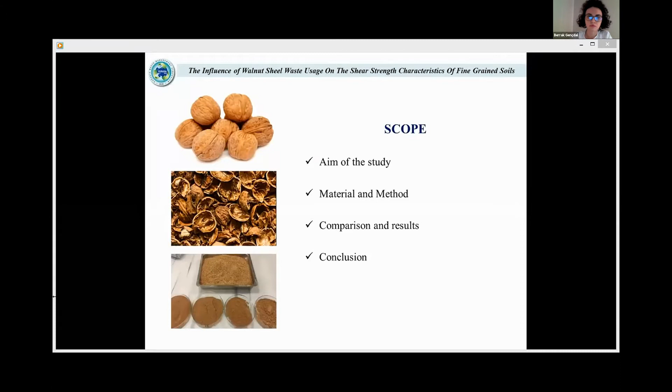Nowadays, the world is seeking solutions to the problems of rapidly decreasing natural consumption and production resources, increasing waste, and decreasing waste storage areas. This problem leads researchers to focus on the recycling or reuse process of materials. In this context, this study deals with the investigation of all herbal resources statistically reported by the Turkish Statistical Institute and the evaluation of the reuse process of these natural herbal wastes.

According to the Turkish Statistical Institute report for 2019, there are 11,251 bearing and 10,004 non-bearing walnut tree crops in Turkey. Besides, the walnut production amount is measured as 222,500 tons. This production process results in the presence of approximately 112,500 tons of shell waste.

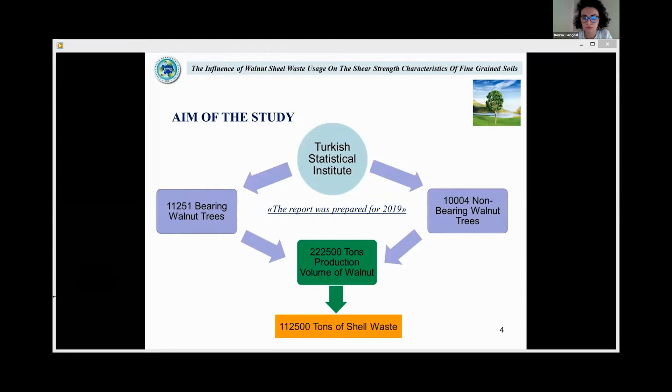This huge volume of waste is used in agriculture, cosmetics, furniture, and heating industries. However, the consumption volume of these materials has not reached the production volume until now. In the context of this study, this additional walnut shell waste was used to improve the kaolin soil.

In the context of the study, as the main material, a white-colored soil with high plasticity obtained from the Kocaeli, Turkey region was used. Experiments have been carried out in the laboratory to determine the geotechnical properties of the soil.

Sieve and hydrometer analysis, pycnometer test, and plastic and liquid limit tests were performed to determine the soil consistency. As a result of the experiments, the soil class was determined as high plasticity according to the Unified Soil Classification System. In addition, as a result of XRD analysis on the soil, 89% kaolin, 3% illite and montmorillonite, 4% feldspar, and 4% quartz minerals were found in the soil.

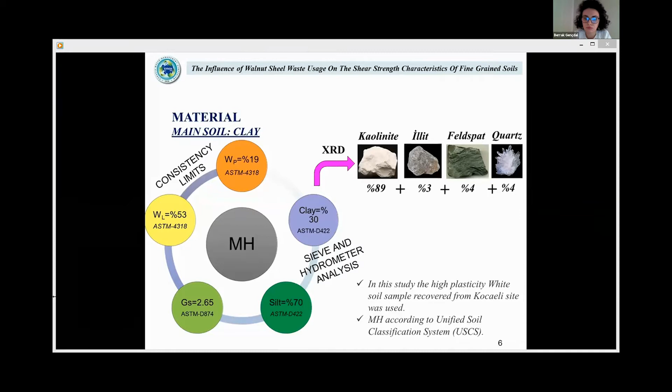If you look at the reason for choosing this kind of soil type, fine-grained soils are considered problematic soils because they show low shear strength under loading conditions and high swelling tendency under unloading conditions. Within the scope of this study, the effects of walnut shell waste on the strength of these soils that need improvement were investigated.

In order to examine the effects of the amount of waste walnut shell on the shear strength of fine-grained soils, soil samples were prepared by adding the additive material in various proportions. For this purpose, the waste walnut shell, 3 or 4 centimeters in diameter, used as an additive material, was broken with a hammer by placing it into a fabric bag, and its dimensions were reduced to between 4.75 millimeters and 0.075 millimeters.

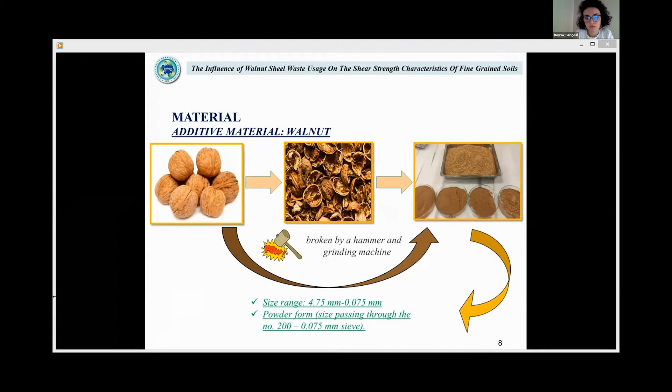In order to examine the effect of waste walnut shell on strength, test samples were prepared by adding pure kaolin and waste walnut shell powder to the kaolin material in different proportions. New soil samples were prepared by adding 5% and 15% of the waste walnut shell by weight of the pure material. The relationship between maximum dry density and optimum water content of the samples was determined by performing standard compaction tests, considering the granulometry of the waste walnut shell added to the soil.

Here, the relationship between the maximum dry density and optimum water content determined by the standard compaction test of all samples is given in the table and graphic. In order to examine the effect of the amount of waste walnut shell and the waiting time on the shear strength behavior of the compacted soil samples, unconfined compression tests were carried out.

Only the compaction test was made for 5% waste walnut shell. Due to the pandemic period we are in, the unconfined compression test could not be performed. In order to determine the effect of the amount of waste walnut shell, the 15% additive rate was examined. In order to determine the effect of waiting time, 0 and 7 days were examined. All of the samples used in the unconfined compression test were prepared by the same method.

The sample which passed through the number 200 sieve during the sample preparation stage was kept in the oven for 24 hours and was expected to lose its temperature after being taken from the oven. The soil was compacted at the optimum water content and dry density values found by the compaction test by adding different amounts of waste walnut shell and kept in the desiccator until the beginning of the experiment. For the unconfined compression test, 3 samples were taken from a compaction mold.

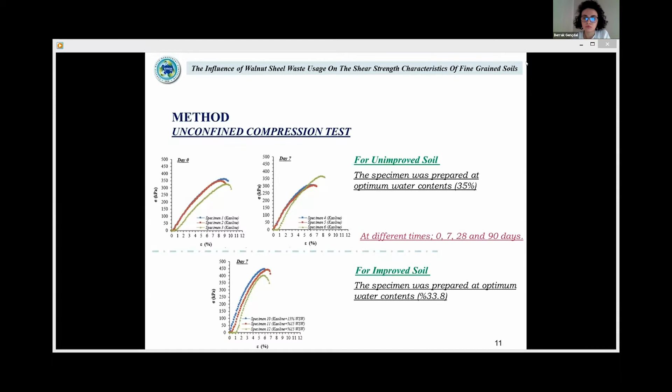The unconfined compression test results on pure kaolin compacted at optimum water content were found to be an average of 172 kilopascal for 0 days and 162 kilopascal for 7 days. The results of the unconfined compression test of the new mixture, in which 15% waste walnut shell was added to pure kaolin, were found to be 215 kilopascal for 7 days. For 0-day evaluations, the failure results of pure kaolin are clear. Due to the pandemic period, there are no failure results for the amount of 15% waste walnut shell for 0 days for now.

For 7-day evaluations, the failure result of pure kaolin was 162 kilopascal on average. The failure result of the new material prepared by adding 15% waste walnut shell was found to be 215 kilopascal. Considering the test results of the new material prepared by adding 15% waste walnut shell and pure kaolin under the unconfined compression test, the increase in the amount of walnut caused an increase of 25% in strength.

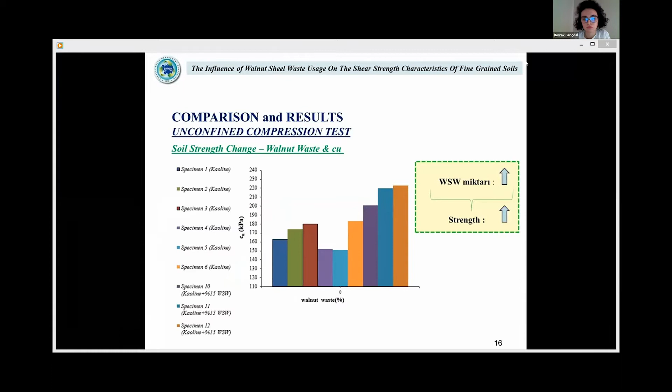The 0 and 7-day test results of pure kaolin are very close to each other. A decrease of 10 kilopascal was obtained in the undrained shear strength values for the 0 and 7 days. Although this value is not a serious loss on the sample basis, no increase in the strength of pure kaolin has been observed over time.

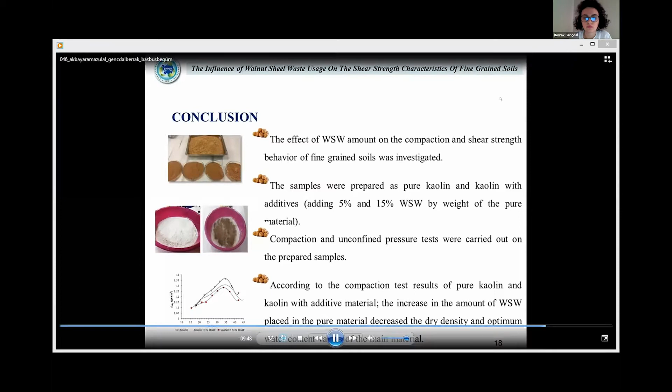The effect of walnut shell waste amount on the compaction and shear strength behavior of fine-grained soils was investigated. The samples were prepared as pure kaolin and kaolin with additive. Compaction and unconfined pressure tests were carried out on the prepared samples. According to the compaction test results of pure kaolin and kaolin with additive material, the increase in the amount of walnut shell waste placed in the pure material decreased the dry density and optimum water content values of the main material.

Unconfined pressure tests were performed on 9 samples in total. Tests were carried out considering the amount of walnut shell waste and breaking days. According to the test result of pure kaolin samples, 0 and 7-day strengths are obtained the same. According to the unconfined pressure test results of pure kaolin and kaolin additive samples, the 7-day strength of the additive samples is 25% more than the 7-day strength of the pure samples.

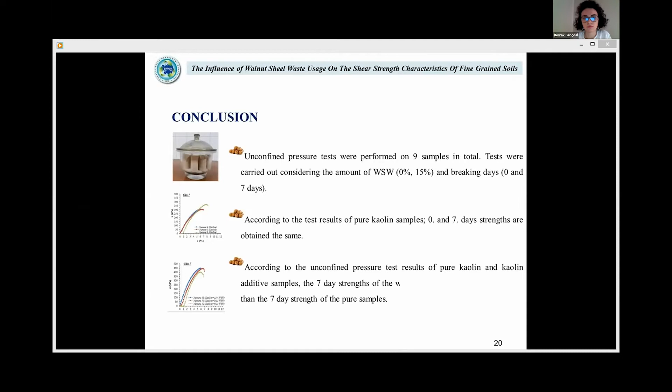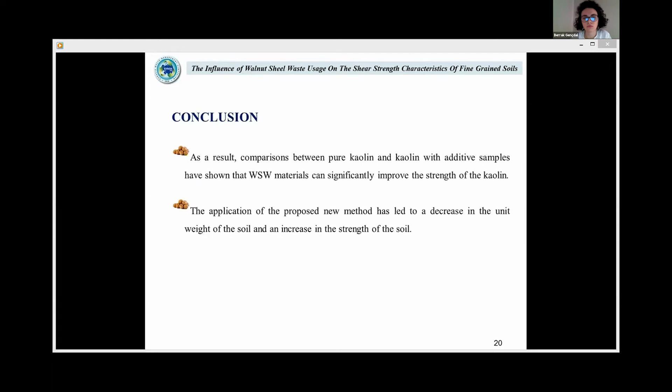As a result, comparisons between pure kaolin and kaolin with additive samples have shown that walnut shell waste materials can significantly improve the strength of the kaolin. The application of the proposed new method has led to a decrease in the unit weight of the soil and an increase in the strength of the soil.

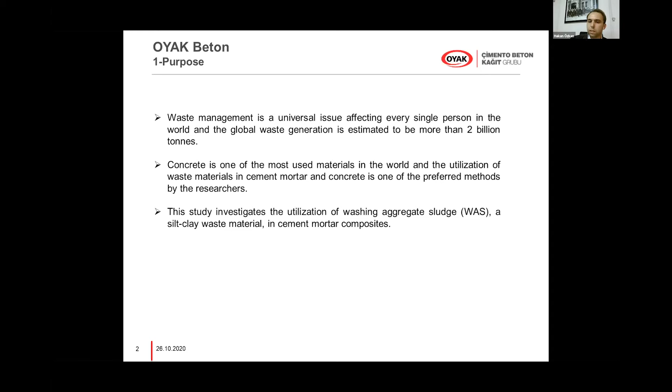So, Turkey is one of the famous countries to produce concrete and cement. It means that we have lots of aggregate quarries, so lots of aggregate quarry waste material. To sum up, concrete is one of the most used materials in the world, and the utilization of waste materials in cement, mortars, and concrete is one of the preferred methods by the researchers. This study investigates the utilization of washing aggregate sludge in cement mortar composites. After that, I will call washing aggregate sludge WAS.

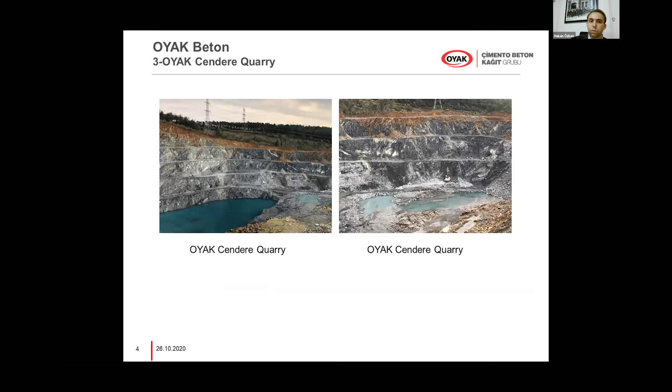The chemical composition of this aggregate is silicon dioxide, so we can call this aggregate sandstone. Due to this chemical composition, the dikes you can see on the left side, and the weathering zone found in the quarry under investigation, this quarry requires some improvements. There are three main products of these aggregate quarries after the process. One of them is crushed sand. This crushed sand includes silicon dioxide, and its methylene blue value is a bit higher, so using this crushed sand in concrete mix design is not possible. Because of that, an aggregate washing system is necessary, and there is one in OYAK Concrete Company's quarry.

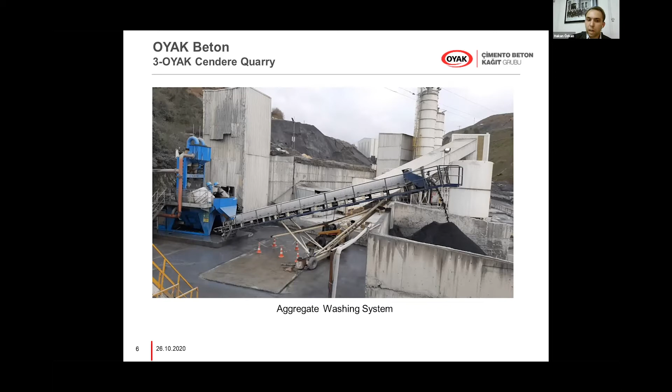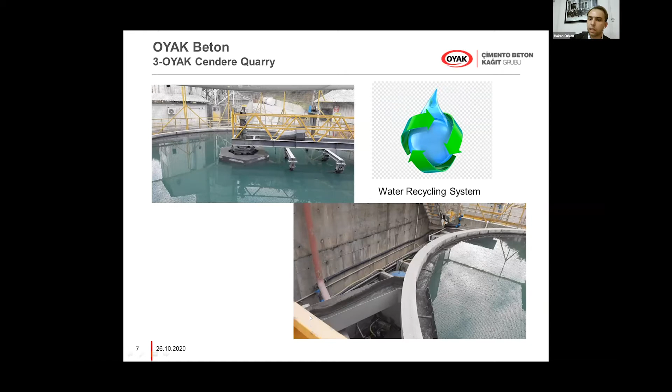At the end of this system, you can see here, there is washed crushed sand. It can be used for concrete mix design, and the methylene blue value is sufficient and very low. But this system produces a waste material, and this waste material is the filler dust with water. It comes to this pool and goes to the bottom of this pool. The bottom of this pool is waste material. The top is clean water, and the clean water comes through the channel to the recycling water stocking area. Here, there's a filter press system. Finally, the waste material, meaning dust with water, comes to the filter press system.

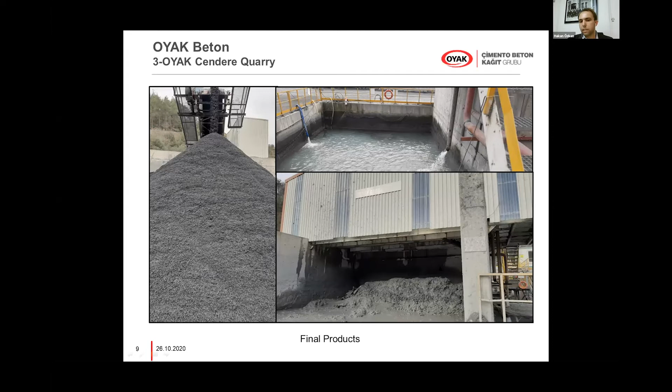Then 3 main products come out. One of them is washed crushed sand. The second one is recycling water. It means clean water that can be used for whatever you want; especially we are using it for concrete mix designs. The last one is washing aggregate sludge, WAS. This is our waste material. You can see here, this waste material has a humidity of 25%. If you want to use this waste material for your experimental study, first of all, you have to dry it and grind it. After that, you can use it.

Now I will show you a short video. This short video will explain the whole process of these aggregate quarries, the aggregate washing system, and the recycling system. It takes 3 minutes. The language of this video is Turkish, but it's not important because I have already explained all of it.

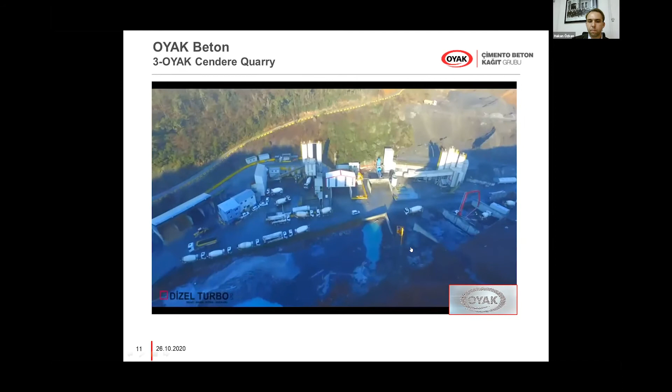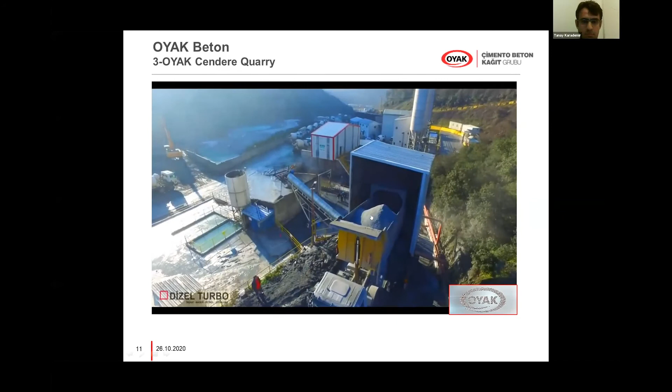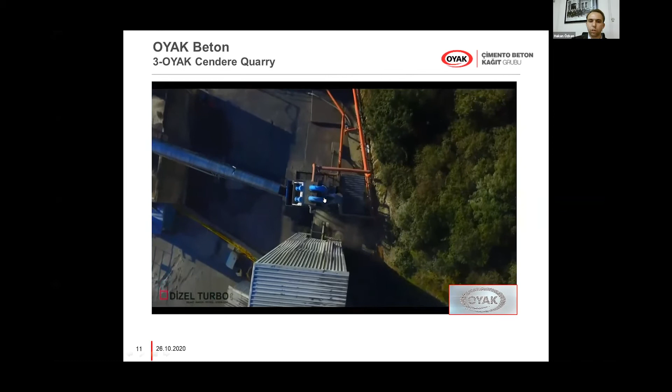This is the Oyak aggregate quarry. There are 2 concrete plants and 1 aggregate quarry. Crushed sand comes to the first loading area. This is not washed crushed sand, and the methylene blue value is a bit higher. Here is the washing system, CDE EVO wash. Final product.

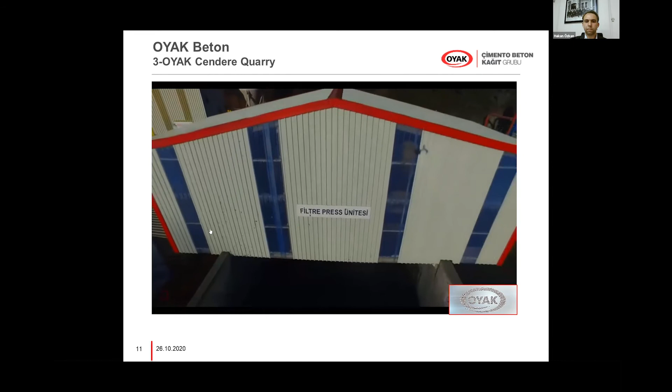Yeah. And we can come to our experimental study. We use this washing aggregate sludge that was obtained from the Oyak Ready-Mix Concrete Company, as I said, and we use type one cement, and we obtained this cement from Bolu Cement, which is also one of the Oyak companies, and silica sand.

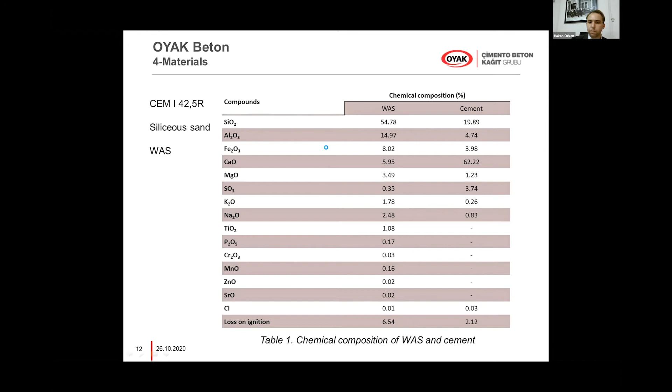And here we can talk about our mix design. Three incorporating methods were used, and their effects on the durability properties of cement mortars were researched in this study by determining the void content, sorptivity, and non-steady state chloride migration tests. And there are 2 different replacement ratios, 10 and 20%. First of all, we performed cement replacement, then fine aggregate replacement, then paste replacement. In total we have 7 different mix designs.

The reference mix design ingredients for 1 cubic meter are here. And as I said, we have 3 different test methods: voids content in accordance with ASTM C642, sorptivity test ASTM C1585, and chloride migration coefficients in accordance with NT Build 492, which we have performed.

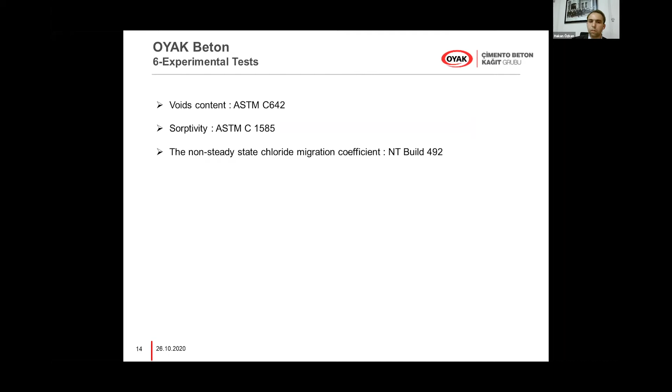For the fine aggregate replacement, sorptivity and chloride migration coefficient are also higher than the reference mortar, but better compared to the cement replacement. And void content is nearly similar to the reference mortar.

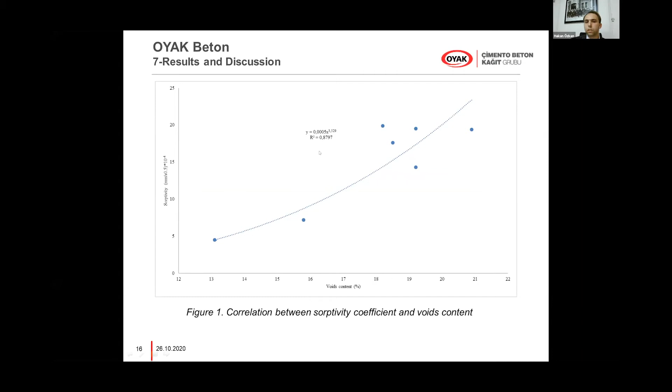And also, we can say that void contents have a good correlation with sorptivity, with a correlation coefficient of 0.88. And a similar correlation is seen between void contents and chloride migration, 0.81.

As a conclusion, the paste replacement method was found to be the most effective way of utilizing WAS in cement composites. The aggregate substitution method provided better results than the cement substitution method. For the paste replacement method, the sorptivity coefficient was reduced by up to 70%, the chloride migration coefficient by up to 7%, and the void content by up to 32% compared to the reference mortars. Sorptivity and chloride migration coefficients have a good correlation with the void content. And that's all.

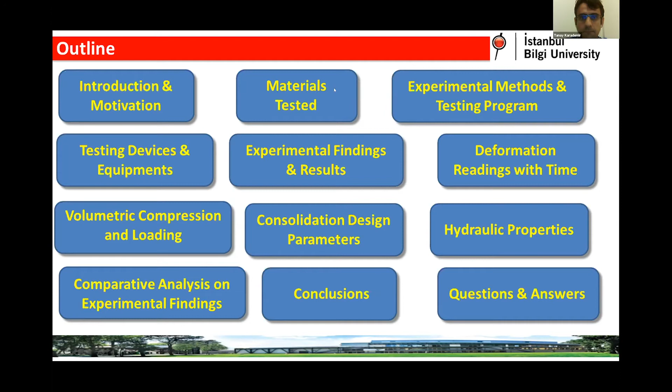lime stabilization or lime soil treatment is a chemical process in which lime is mixed with in-place soil, and later lime reacts with clay particles in the soil to provide a cementitious matrix. In this perspective, lime has been used as a modifier or binder, and the treatment of clay, especially having high plasticity, will result in reduction of the plasticity index, and thus the clay will possess less affinity with water and less tendency to exhibit substantial volume changes such as dilation or contraction.

In engineering, the improvement of engineering design properties of a soil in the geoenvironmental area must satisfy the project requirements. This is called soil stabilization. The design of landfill baseliners, including a clay layer as a water-resistant impervious layer, requires a neat engineering approach considering consolidation behavior and hydraulic properties of the clay. For safe and stable design of the baseliners, we need to reduce the consolidation settlement in clay when it is subjected to waste load.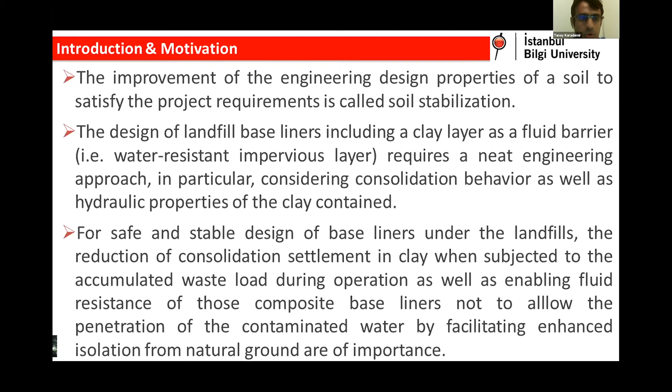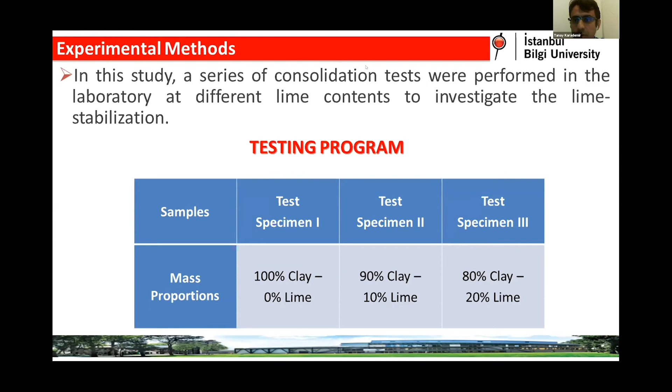This is the testing program. A series of consolidation tests were performed at different lime contents, 0%, 10%, and 20% lime added into bentonite clay. The results of the consolidation tests were used to determine consolidation engineering parameters, including coefficient of consolidation, compression index, recompression index, and coefficient of permeability for assessing hydraulic characteristics.

The test specimens had dimensions of 6 centimeters in diameter and 2.5 centimeters in height, and were placed in a stiff metal ring between two porous stones. Each test continued about 6 days with sequential incremental loads of 5, 10, 20, 40, 60, 80 kilograms successively. Each load increment was maintained 24 hours, and vertical displacements were measured every day at different loading conditions.

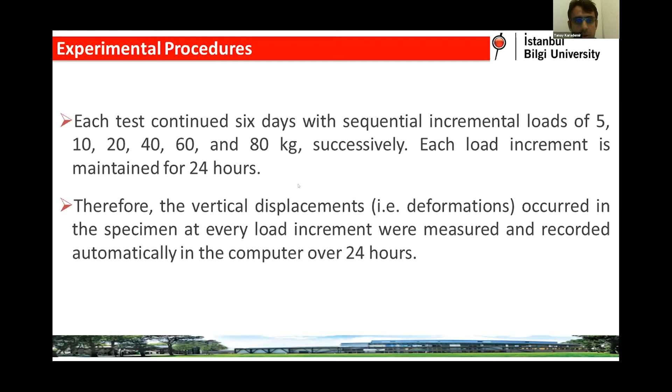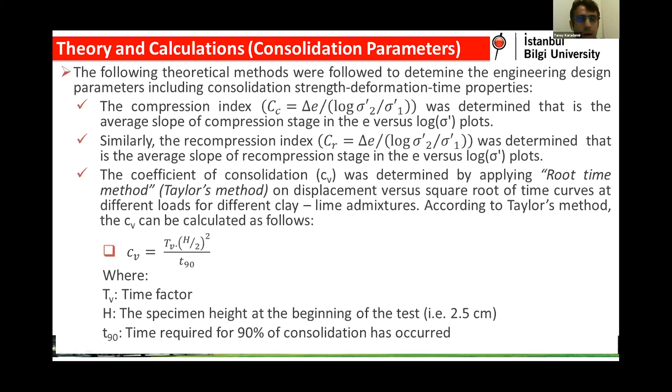I would like to briefly mention the theory and calculations. The following theoretical methods were used to define consolidation parameters, such as the compression index, the slope of the e versus log sigma prime curve, and the recompression index was also determined. Additionally, we calculated the coefficient of consolidation Cv using Taylor's method, as you see in the equations. Hydraulic conductivity properties were also determined based on Terzaghi's one-dimensional consolidation theory using this equation.

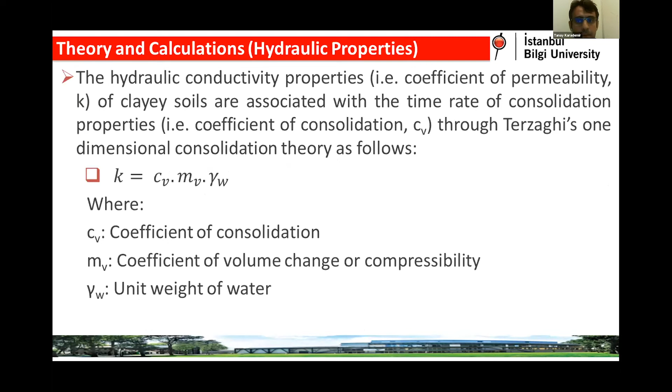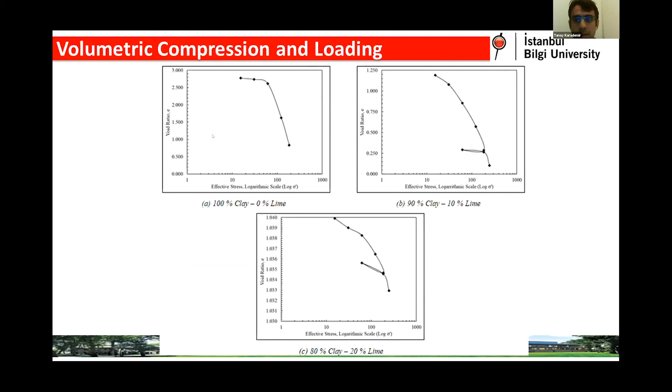Now we see the void ratio versus effective stress graph in order to understand volumetric compression due to loading. Here, the compression and recompression stages are evident in the curves. We see that the behavior is basically elastoplastic, so some part is recoverable, and another is permanent. For the recoverable part, we defined Cr, the recompression index. For the plastic stage, we defined the compression index. Additionally, unloading and reloading stages were performed.

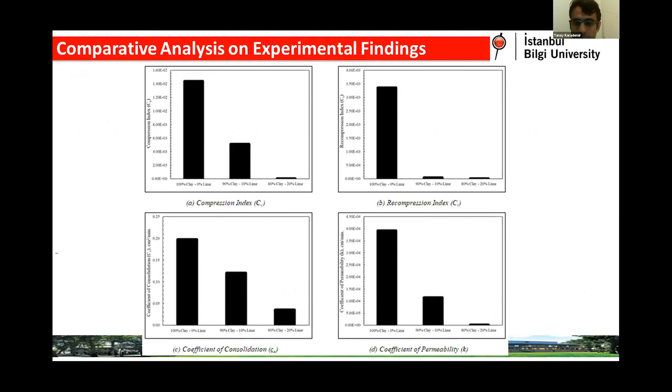Here are the results of the comparative analysis of experimental findings. Addition of lime has resulted in the decrease of compression index, recompression index, coefficient of consolidation, and permeability. Here are the values. The compression index has reduced from 10 to the minus 2 down to 10 to the minus 5. Similarly, Cr, the recompression index, reduced from 10 to the minus 3 down to 10 to the minus 6.

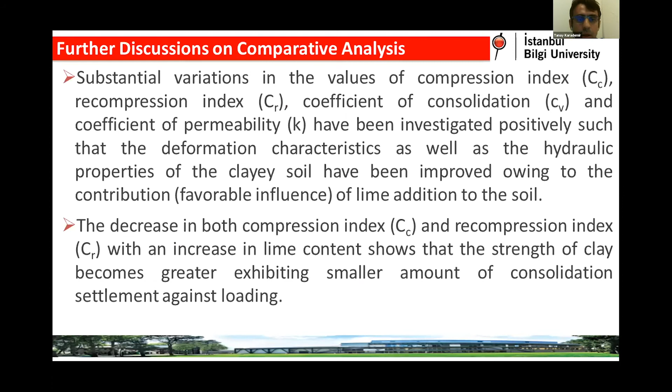And so the substantial decreases in the values of CRCC is due to adding lime, so that has a positive impact. And also, hydraulic coefficient of permeability, hydraulic properties, shows a reduction. This is good for enabling isolation or insulation.

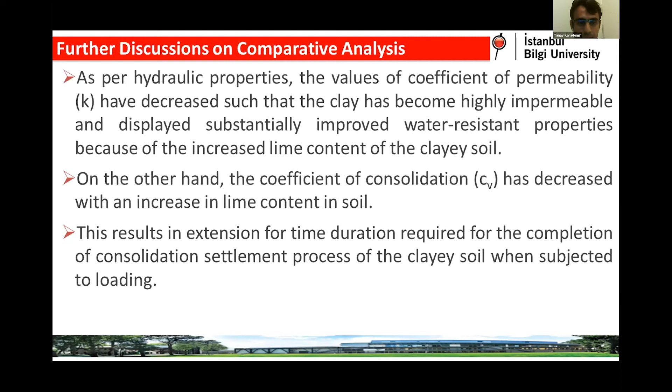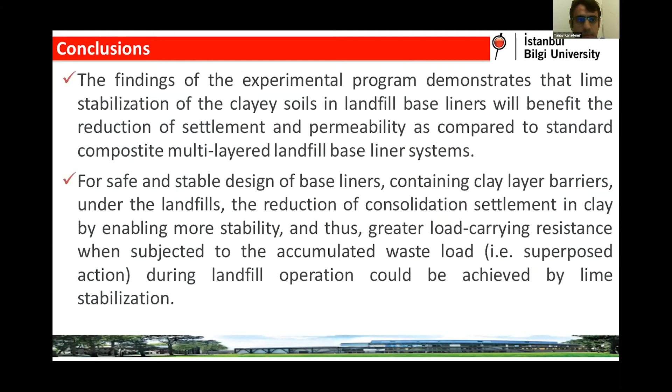And the findings of the experimental program demonstrate that the lime stabilization of clay soils will result in the reduction of settlement and the permeability properties. So, for safe and stable design of the baseliners containing clay, will benefit the project. And reduction of hydraulic conductivity, correction for permeability, will result in the isolation of the system.

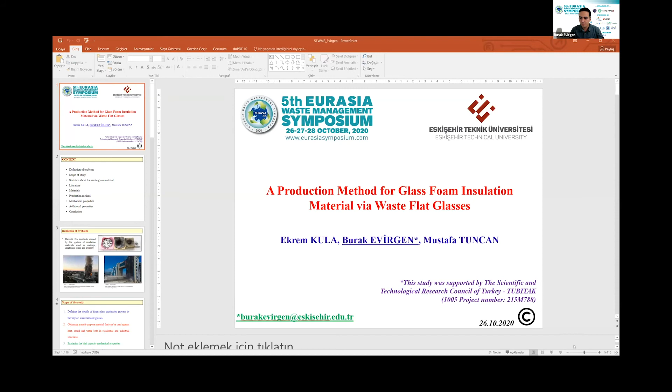Okay. Welcome, dear guests. I am Burak from Eskişehir Technical University. Now I am working at the Geotechnical Division in our Civil Engineering Department. In fact, my points of interest are soil improvement techniques, artificial ground freezing, soil foundation interaction, and maybe pile foundations. Although my real point of interest is geotechnical engineering, today's subject is related with material properties.

We try to reuse waste flat glasses, waste window glasses, within the production of glass foam insulation material. It is a part of our TÜBİTAK project, a detailed TÜBİTAK 1005 project. And this type of project is related with the domestic production of import materials. And we know that we do not have any production of glass foam material in our country, and we try to offer it as an alternative material.

This is the content of my presentation. First of all, I would like to define the problem about the insulation materials and then the scope of study. I want to give some statistics about the waste glass materials within our work. And then literature, the critical point in the literature. And I will list our raw materials, foaming agents, and the production method. And maybe we can talk about the mechanical properties. And our foam glass material has additional properties if you compare with its alternative insulation materials. And I'm going to list the conclusions of this study.

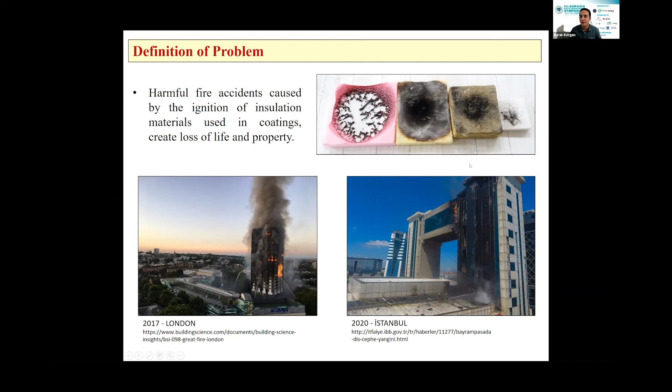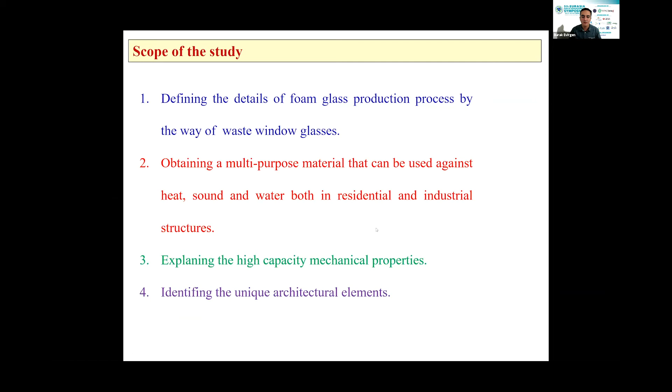And these are the scopes of our study. First one is defining the details of the foam glass production process by way of waste window glasses. The second one is obtaining a multi-purpose material that can be used against heat, sound, and water at the same time in residential and industrial structures. Third one is explaining the high capacity mechanical properties and identifying the unique architectural element. It is maybe our additional property.

And a little bit of statistics from literature. If we focus on the European countries at the beginning of the 21st century, their recycling amount reached up to 75%. But in our country, around the same time, our recycling ratio was around 23%. But after around 10 or 12 years, our recycling ratio decreased to around 5%. Also, our waste materials are increasing, but we must recycle them into suitable materials.

If you search the literature, we can find many foam glass materials with different raw materials, different foaming agents, or different mechanical properties. But this point is so important. The glass foams in the literature are not suitable for mass production in industry. Many of them are generally produced as laboratory scale specimens.

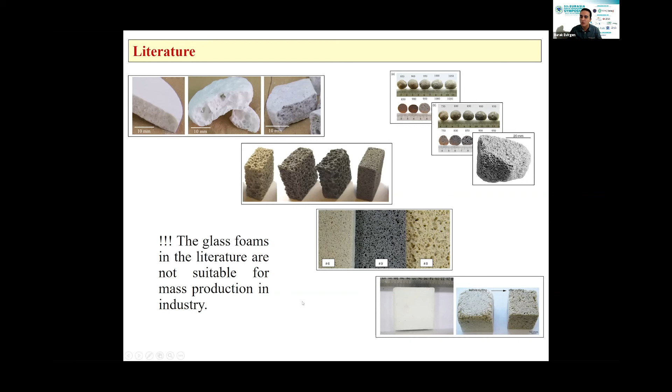These are not suitable for industrial production. We try to produce big scaled foam glasses in our project.

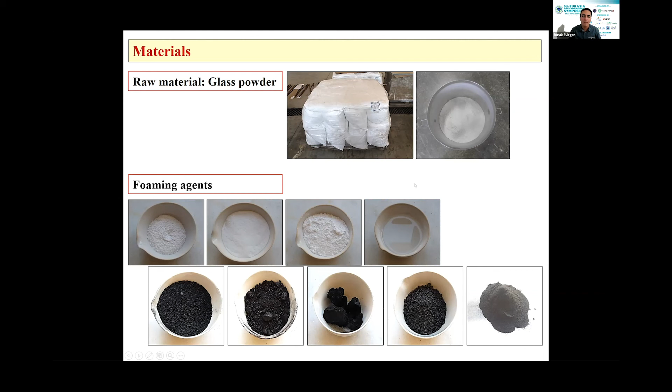This is the production method. The first stage is the mechanical processes, as I said before, for production of type 2 glass powder. We take broken glasses from our university and break them into smaller parts by hammer, then put them into the process.

Into the Los Angeles abrasion machine. As you know, we generally use this machine for concrete or asphalt pavement elements to determine the abrasion value. Then the final stage requires the grinding process also.

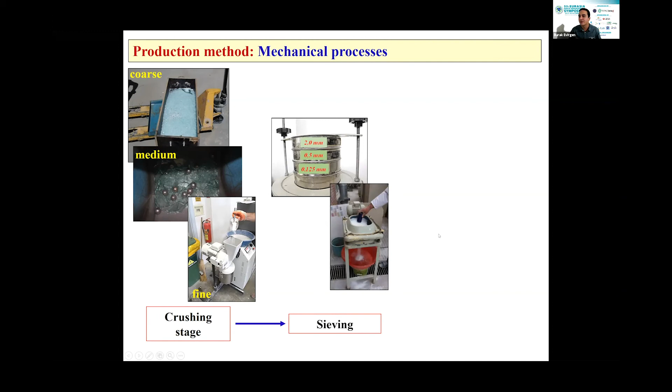After these processes, we pass to the sieving stage for the raw material, only the waste glass powder, and sieve it up to reach the 125 micron level. Then the mixing process comes, where raw material and foaming agents are mixed together.

The molding stage, I think, is the most important stage of the production method. We also produced 3 different elements.

One of them is plate elements for exterior or interior covering of buildings. The next one is architectural elements for production of aesthetical elements, and the last one is fitting parts for industrial applications. In the plate molds, first of all, we used a vermiculite type of molding material.

Vermiculite is a type of clay element, and these plates or molds are produced with the compaction of vermiculite grains. We also produce different sizes of elements, for example a 10 centimeter unit length cubic element, and a 1 meter by 1 meter large scaled element.

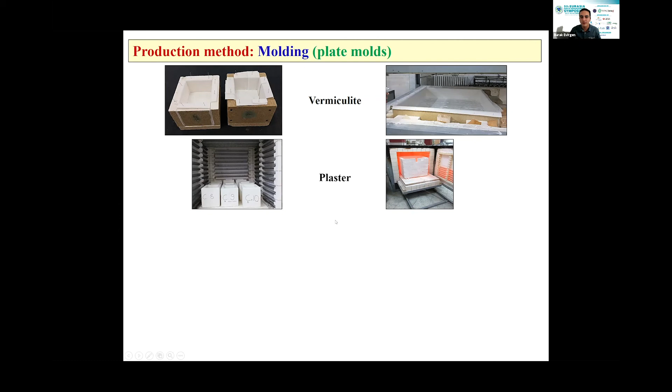In the next stage, we use plaster material for production of the plate, and then standard industrial steel is used. Finally, we decided to use stainless steel as a special product for molds, for a 50 centimeter by 50 centimeter unit volume also.

Sandblasting is applied to the stainless steel material, and then we use a paper type of material to easily take the specimens out of the molds also.

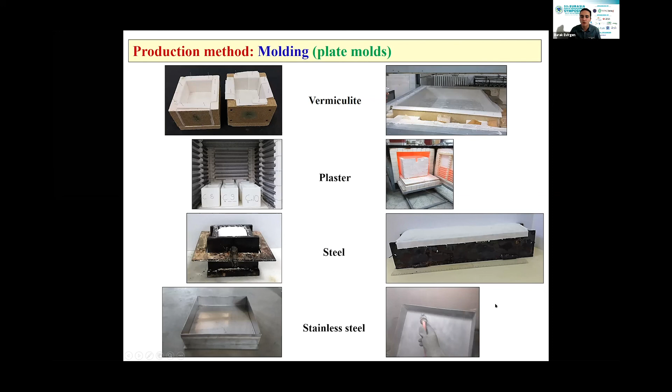The last stage of the molding is the fitting molds, and we use refractory ceramic material to design unique molds in that case. And these are the final products.

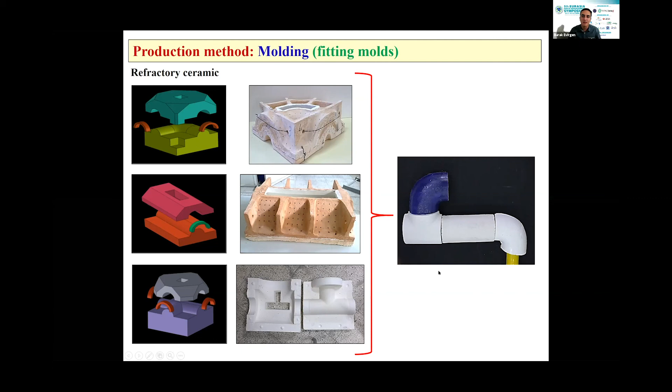Also, we produced fitting elements, producing foam glass materials for the outside of pipe elements for industrial application. As you know, some firms work with high temperature hot, or minus degree cold, within their piping systems, requiring this fitting insulation.

It is essential also. The next stage is the sintering and sizing processes. As you know, sintering is the other name for heat application.

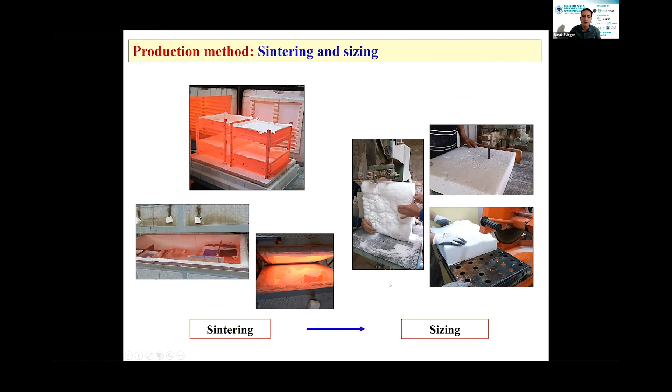We tried 10 different heat processing methods, or heat diagrams, inside different types of ovens. After completion of foaming up to the required thickness, the sizing stage started, using different types of saws to size our original members.

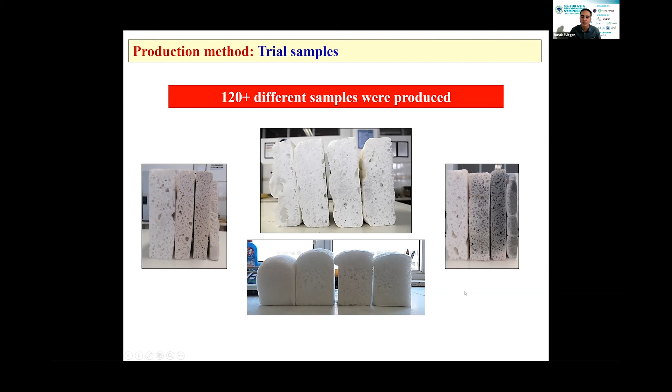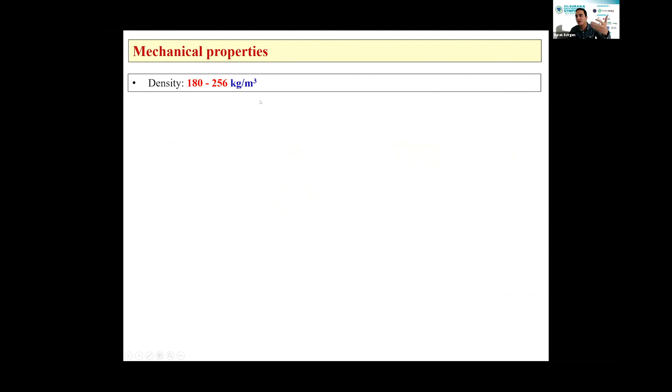Let's talk about the mechanical properties of our foam glass materials. These 6 different foam glass materials, final products, have superior mechanical properties, and their density changes between 180 to 256 kilogram per cubic meter. This density range can be reached up to 400 kilogram per cubic meter around worldwide.

Water absorption capacity in terms of surface absorption is around 0, and it can be used as waterproofing at the surfaces also. The water absorption capacity according to immersion test can be reached up to 3.5 kilogram per square meter or cubic meter according to the TS standard. But the important one is the surface absorption capacity.

The temperature insulation delta T changes between 9.6 to 11.1 Celsius per centimeter. And sound insulation, we can reach a 20 to 30 decibel sound insulation level. And all of these 6 different specimens have A1 class fire resistance certificate.

The thermal conduction coefficient, lambda, changes between 0.03 to 0.05. The maximum range of this value is given around 0.06 inside this standard, with the unit of watt per meter Kelvin. And the compressive strength is maybe the unique point of our material.

The compressive strength value can reach up to 1.2 megapascal. It is an incredible value because it is an insulation material. If you compare it with XPS, EPS, or rock wool, glass wool, any type of insulation material, it is so high level, and its strain can reach around 25% under this amount of compression strength. So some of our materials are brittle, some can be classified as ductile elements.

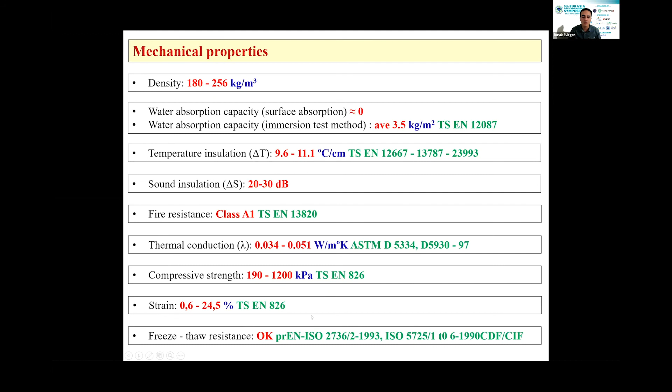And freeze-thaw resistance is okay, there is no problem with the freeze-thaw effect. Shortly, I'll give additional properties here.

Colorful production can be obtained if you add colorful dust, colorful powders inside your mixture. You can directly provide colorful production. And their surface is colorable — plastic color, oil color, or spray color, any type of color can be applied directly on the surface.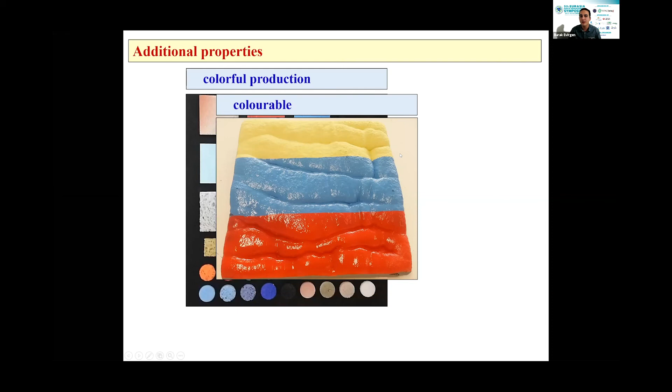It has a perfusive property — what's the meaning of that? The mortar or plaster, any type of plaster can be directly applied on its surface because it has space, and also high amount of friction resistance on the surface. It is easy to shape, and maybe the most critical point within this conference, our materials have infinite recycle possibility. It is so important.

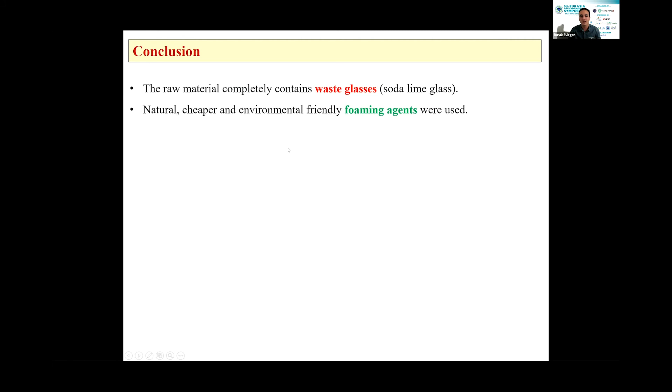And these are conclusions. The raw material completely contains waste glass, soda lime glasses, window glasses, or wet flat glasses — these are our standard glasses. And natural, cheaper, and environmentally friendly foaming agents were used.

Sintering technique was directly used on the dry mixture, and the dry mixture is another unique point. Operating costs are dragged down since a relatively low temperature was applied — our peak value is around 850 Celsius, which can be reached up to 1,200 degrees in other production processes.

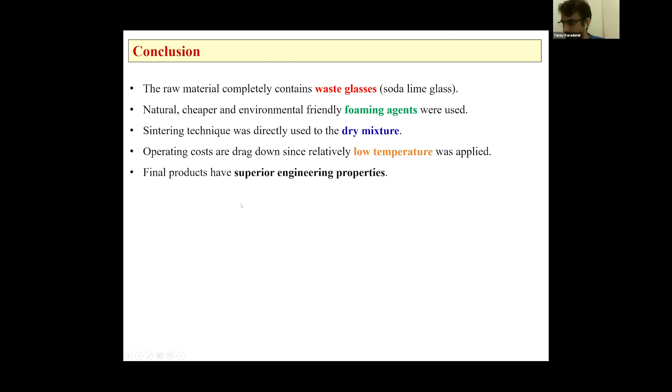Final products have superior engineering properties. Industrial scale glass foams were produced successfully, and also national and international intellectual property rights have been acquired with patent appeals. All rights have been reserved also.

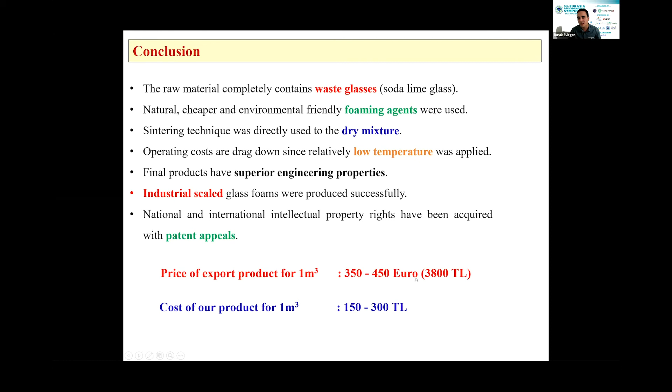Maybe another important critical point: the price of export product of glass foam for 1 cubic meter is around 4,000 Turkish liras at current prices. The cost of our product for 1 cubic meter changes between 150 to 300 Turkish liras. There is a high difference between them because we use waste glass powders and natural rocks as foaming agents.